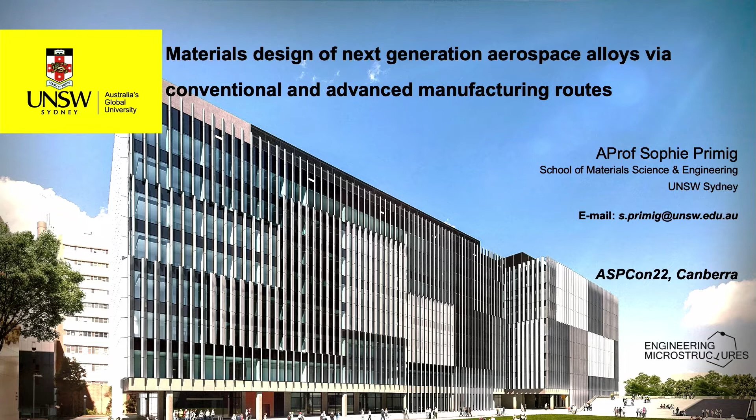Just to begin with, what I do in my day job: I lead a research group of around 20 early career researchers, so that's postdocs, PhD students, and undergrads. We are interested firstly in next generation aerospace materials, but more recently we also got into the quite exciting area of metal additive manufacturing.

My research is funded roughly 50-50 by collaborations with national and international industrial partners, sometimes also by the Australian Research Council linkage scheme. However, in the last 4 years or so, the real game changer for my group has been funding by the so-called AUSMURI project, which is supported by DST—more on that later—and that's how we got into metal AM, which I regard as the future way to go for Australia.

We have access to amazing facilities for processing, characterization, testing, and modeling of alloys, and the alloys that my team is interested in for aerospace are nickel-based superalloys, titanium alloys, and several advanced steels.

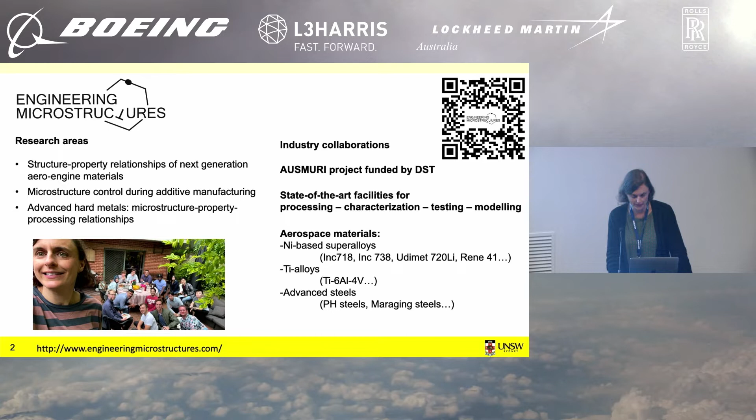A lot of the motivation for my research, which ties nicely into the previous talk, is that there's a lot of air travel. Obviously it's been a bit disrupted by the global pandemic, but there are still forecasts, for example this one by Airbus, which predicts around 39,000 new aircraft within 20 years.

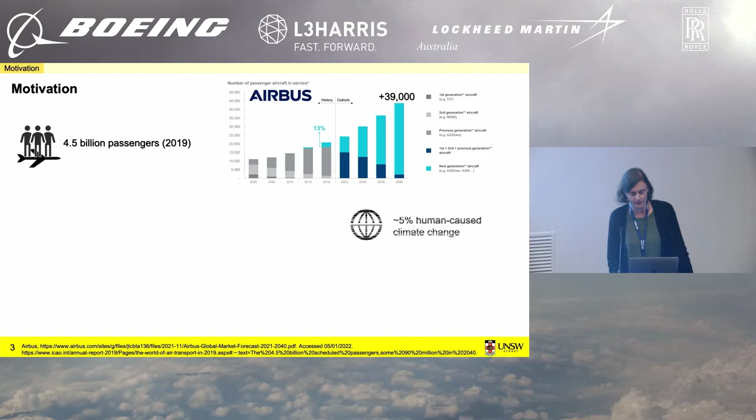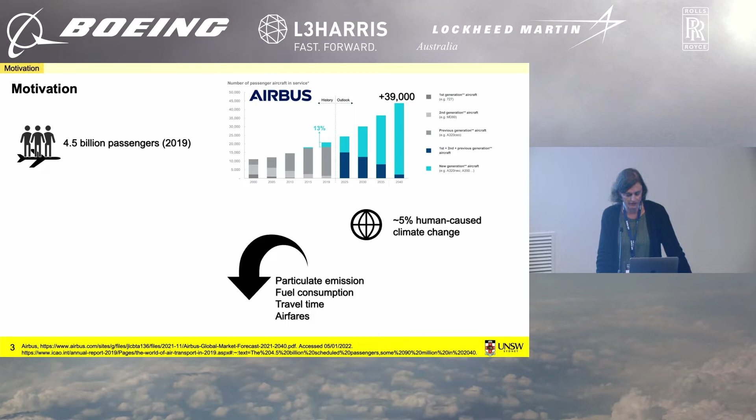What's even more important is that all of these aircraft will have next generation aircraft engines, so different technology. Taking into account that a lot of climate change is due to air traffic, one way we can improve this situation is to reduce particulate emissions, fuel consumption, and what's good for passengers is reduced travel time and airfares as well.

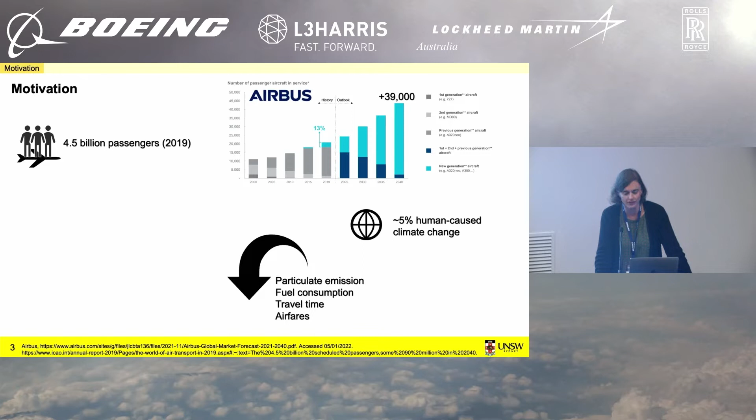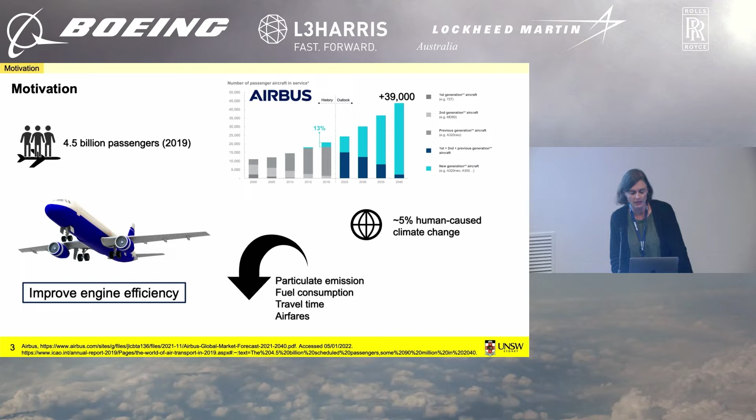One very important means to do that is related to improving engine efficiency, and that ties closely to materials engineering. So let's have a look at an aircraft engine. It has a bunch of different parts, but we are often interested in the high pressure turbine and low pressure turbine.

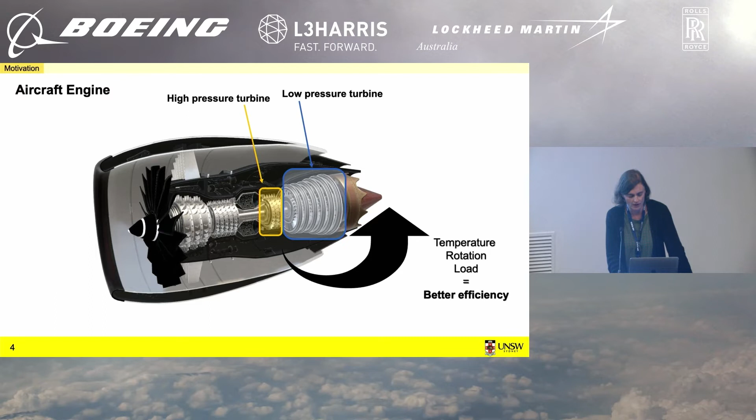Here a higher temperature, faster rotation, and higher load translates right into better efficiency. So the part that my research has focused on for probably a decade or so is the so-called turbine disc—that's this part here that carries the so-called turbine blades.

In order to increase the efficiency of aircraft engines, we want high temperatures, ideally above 650 degrees C. There are high mechanical loads, fast rotation, and very harsh environments—fatigue, creep, corrosion, oxidation, and all that. Therefore, we need so-called nickel-based superalloys to build these parts.

So in order to make better turbine discs, we need to understand the interrelationships in materials engineering. What we want is obviously better performance and better properties. We can tweak the processing to achieve that, but the really missing link between all of those is microstructure, and that's what my team and I are pretty good at.

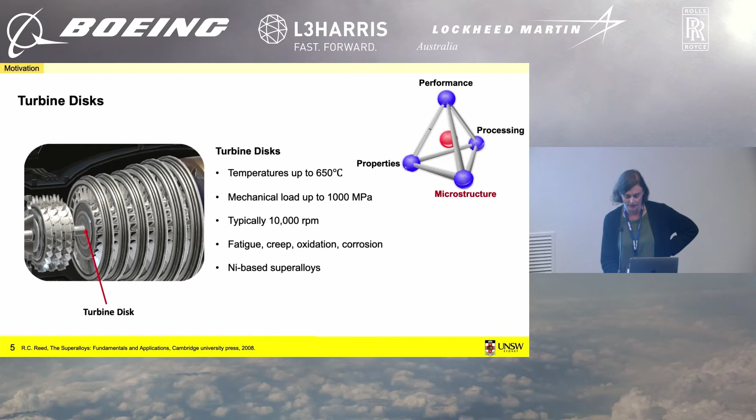So let's look at how we can make modern aircraft engine parts. There's obviously conventional routes—this is a photo from an industrial partner based in Europe. It's actually massively complicated, and conventional processing requires large plants.

You need to cast these materials, remelt them often 3 times, undergo a complicated multi-step forging procedure at high temperatures, and at the end apply a thermal treatment to get amazing properties. However, nowadays there are new ways of doing that via metal additive manufacturing.

My team is very often interested in powder bed fusion, so more on that later. But what we ultimately want to achieve is to shift these curves to higher temperatures and higher strength, and you can do so by getting the best out of existing materials and by designing new materials.

This is an example from my research on alloy 718, where we work a lot on a forging schedule called DA, or direct aging, that achieves the highest strength properties.

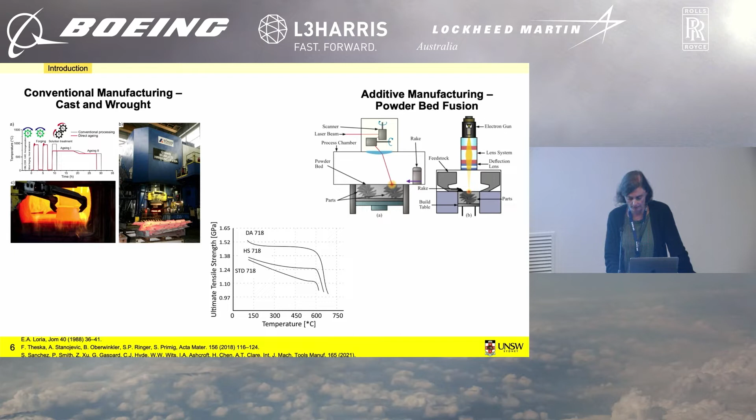The key for all of that, as I said, is microstructure characterization, and we do a lot of microscopy. Don't worry about the details here—what I just want to show with this slide is that we need a bunch of correlative techniques, ranging across several length scales, because these microstructures are highly hierarchical, and that's how we achieve amazing properties.

We can use light, on the left-hand side here, to show grain and dendritic structures. We can use electrons to go from the micrometer towards the nanometer scale. We can extract crystallography information, and we can extract information in 3D.

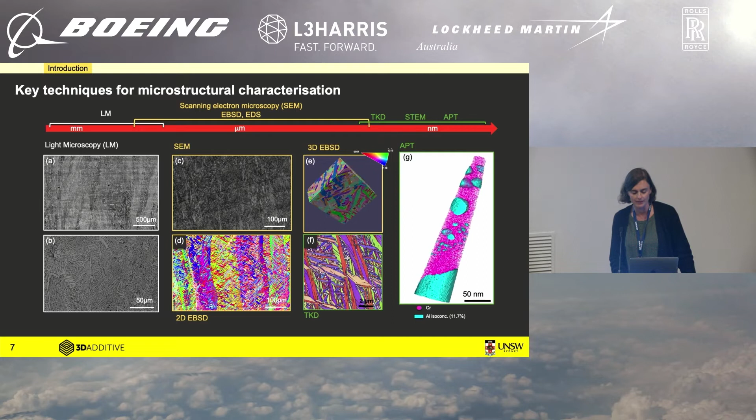Another quite important tool for my research is the so-called atom probe, where at the nanoscale we can image individual atoms and understand the nanoscale chemistry and morphology.

Let's apply that to an example from conventional processing. What you can see here is the slice of a real-world forged turbine disk made out of Inconel 718, overlaid by a hardness map. You can see there's vast differences because these parts are really complicated, and what we don't want to have - this is a worst-case scenario map here - in this blue region D, we achieve a way lower hardness than in the other regions.

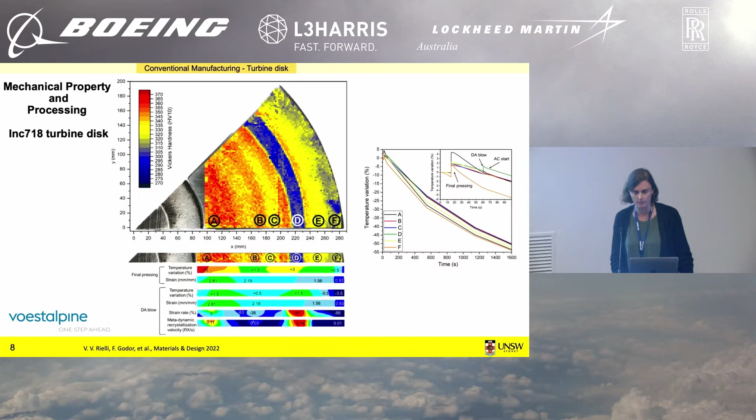So what my industry partners and I do is a lot of modeling, so we can find out things such as temperature, strain rates, strain, recrystallization, thermal profiles, etc. But all of that is not enough to create a real digital twin of these turbine disks and the different positions.

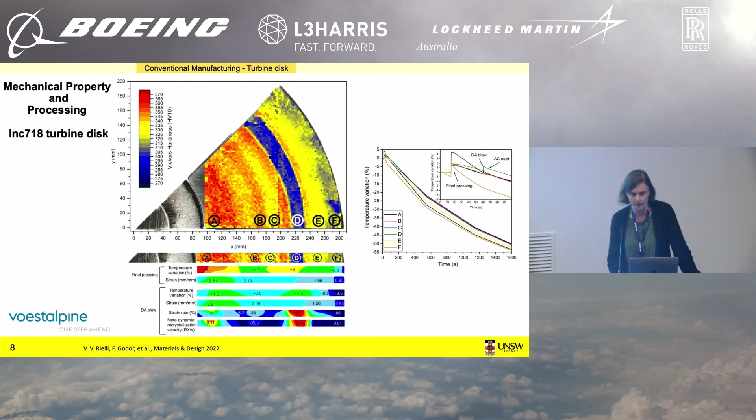So let's dive into the microstructure here. What we did is characterize a bunch of interesting regions. I mainly want you to focus on region D, which has the worst case properties. On the micrometer scale here on the left, you can see individual crystallites, individual grains - that's how this material is made up on the micrometer scale. We can see that in this region D, the grain size is much larger.

Another example is shown here. What we're interested in is having a slightly higher volume fraction of these white particles than we see here in region D. That's the so-called delta phase. It's very important to pin grain boundaries during processing, and it's also an important source for niobium that we need in the next step.

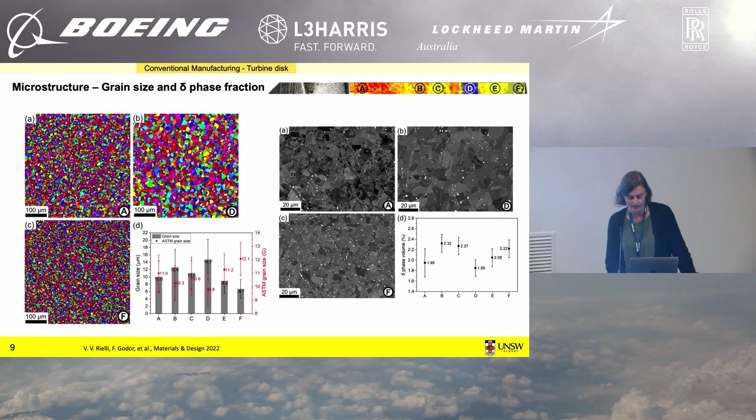In the next step, here you can see some atom probe microscopy - real nanoscale information of forged positions from this disk. What you can see is a slight decoration of the microstructure with nanoscale particles. There's two kinds in this alloy: one are called gamma double prime precipitates, rich in niobium, and the other ones are called gamma prime, the turquoise ones. So after forging, there's only a little bit happening.

The good news is the direct aging process is really robust, and if we subject these disks to a final thermal treatment, we achieve what we want - a very dense and interconnected nanoscale decoration with precipitates.

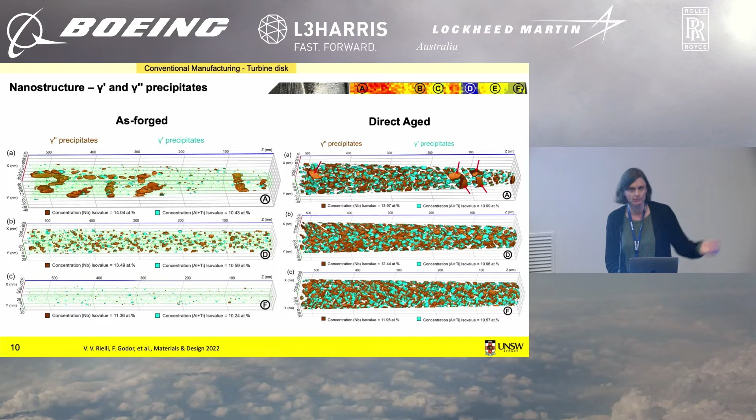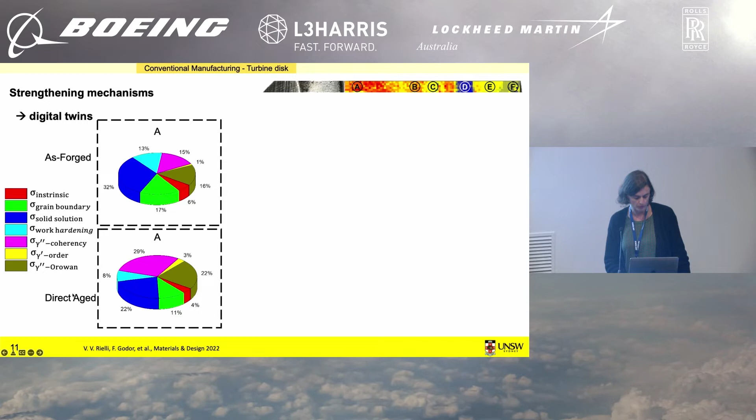So that's all very nice, but why is this useful? My industry partners can create digital twins where we can very accurately predict all the various strengthening contributions. Don't worry about the details here, but there's many, and that's related to the microstructure, and we can do this for all these different positions, and then create turbine disks with better properties.

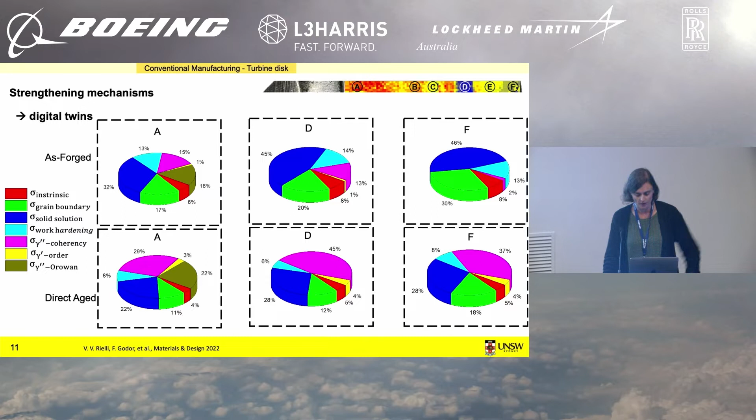I want to jump on to another quick example for really aerospace. This is a material, Rene 41, that's also being manufactured in Australia, in Perth. It's actually an old alloy - it's been to outer space, which is pretty cool. Project Mercury, these capsules, had Rene 41 shingles to protect during re-entry.

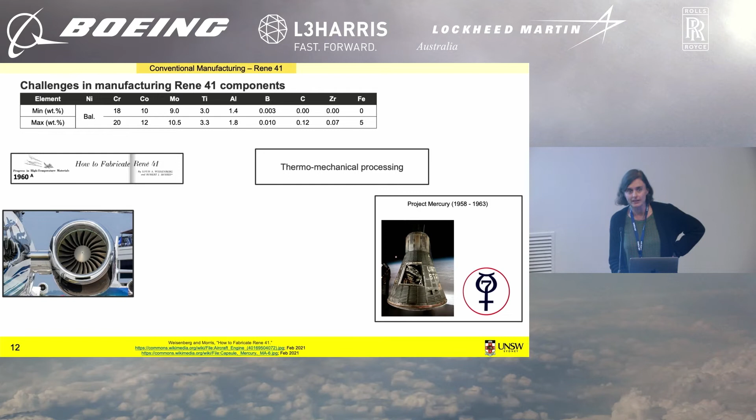This is one of the most highly alloyed and strongest nickel-based superalloys, and it's crazy interesting for next generation aircraft engines. However, it's not easy to manufacture, and if you get it wrong, this happens, and this is going to go back to the scrapyard, and that's going to be huge losses for the industry partners.

So what we do in my research is modeling, so we can predict precipitation of secondary phases as a function of the alloying contents. We can underpin this by microscopy, and with that we can define safe processing conditions for my industry partners to make better Rene 41 parts.

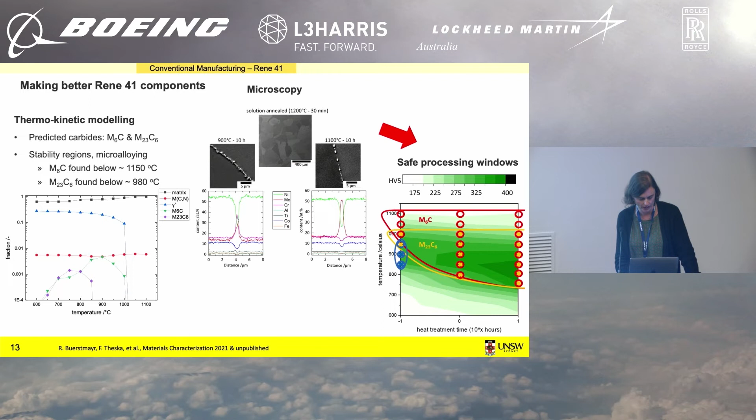I now want to jump on to what I believe is maybe the future for Australian manufacturing of aerospace alloys that's independent of supply chains and more resilient. This is related to metal additive manufacturing, and I want to shout out to the so-called AUSMURI funding.

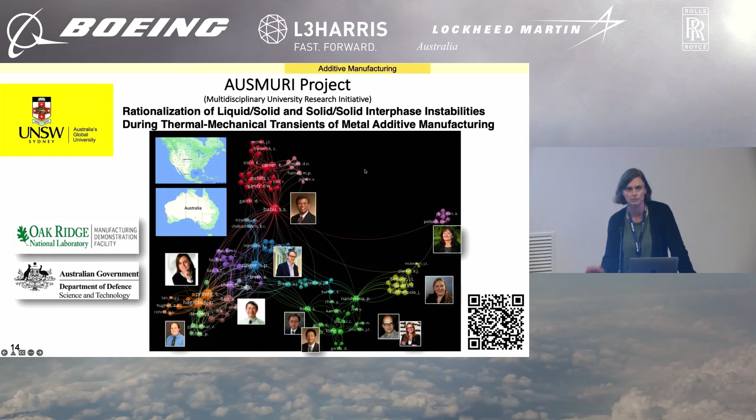Our project, don't worry about the complicated name, is on metal additive manufacturing. It's in its 4th year. I collaborate with a team from the University of Sydney, so we are very good friends in this - Professor Simon Ringer and Professor Xiaozhou Liao. And we are also connected with 6 universities from the United States, led by Professor Suresh Babu at Tennessee Knoxville, who has strong linkages to Oak Ridge.

And then we can create 3D objects that are very complex and intricate. This is also a little bit of an advertisement for my colleagues at the University of Sydney. They have recently launched a new Sydney Manufacturing Hub where we can 3D print titanium alloys, steels, and nickel-based superalloys using electrons and lasers, and also 3D print ceramics and all sorts of exciting stuff.

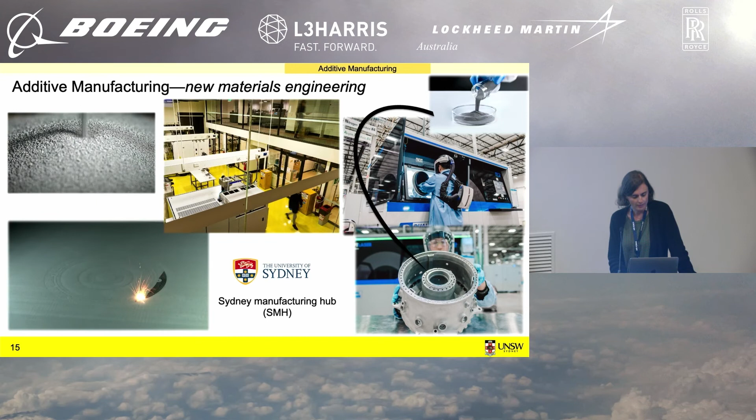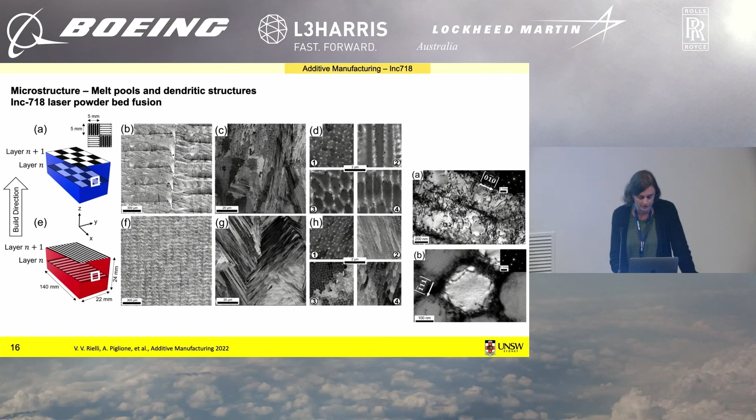So just coming briefly back to the Inconel 718 example, the turbine disc we've seen before. Rather than playing with forging in 3D additive manufacturing, we can play with the scanning strategy of the laser beam. Here's a chessboard pattern, and at the bottom a linear pattern, and again you can create vastly hierarchical and different microstructures. We need to study them across several length scales to understand how we can achieve better properties.

We can also subject them to thermal treatments to achieve the same kind of nanoscale structure of gamma prime and gamma double prime particles, and we can use that to put into models and predict better properties.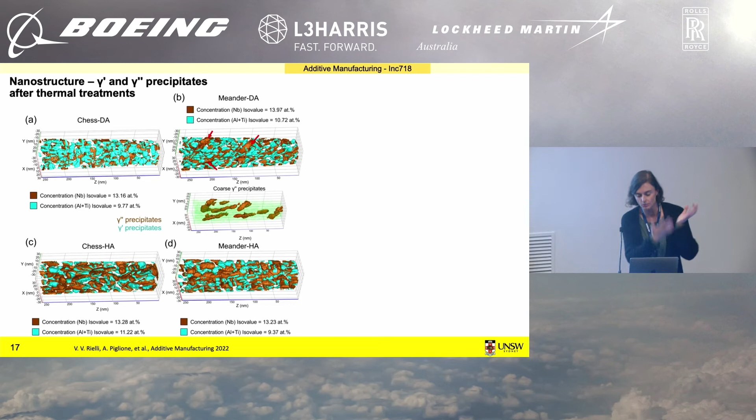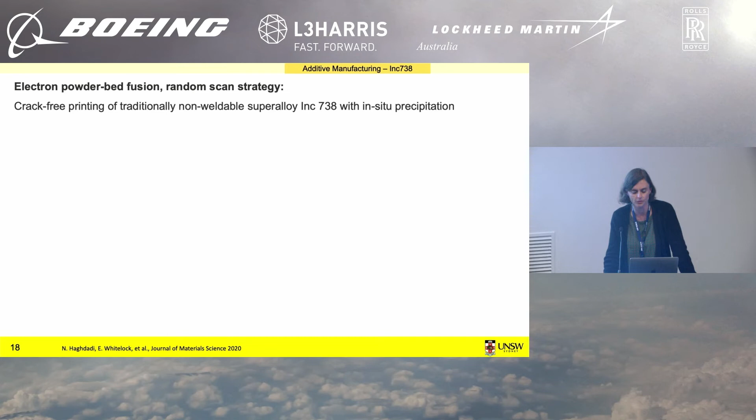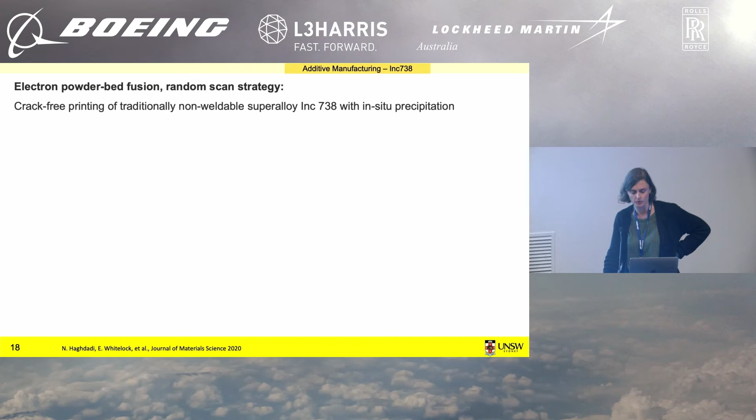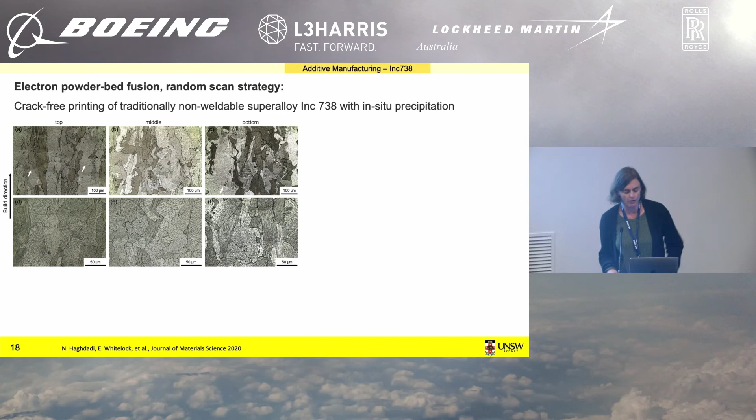Last quick example, this is for electron powder bed fusion, and we're very excited because the electron beam allows us to do very different and new scanning strategies. We used a so-called random scan generator, which just fills random points. This enabled us to print a traditionally non-weldable nickel-based superalloy, Inconel 738, crack-free. You just have to believe me based on these micrographs. And at the same time, without any additional thermal treatment, because this is done at slightly elevated powder bed temperatures, we achieved a nanoscale in situ precipitation of the particles we wanted to have.

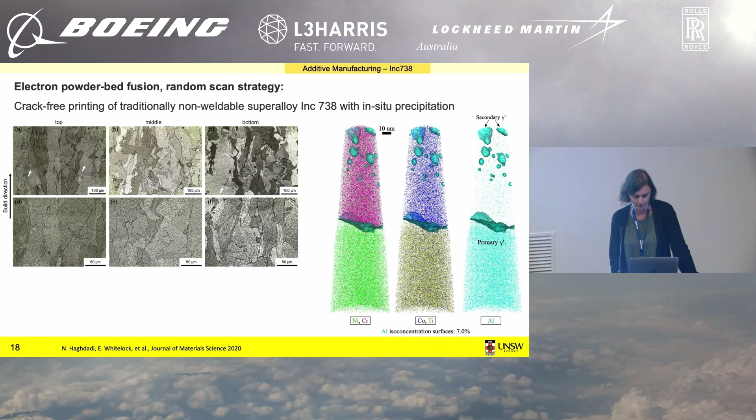So to sum up, microstructure and materials engineering will enable us to ultimately create better aerospace parts with superior mechanical properties. I can maybe relate that to the example from yesterday, the spear, if you remember. What my team can do is provide the perfect material for the spearhead, right? And this is how it fits into the larger scale of things.

We can also provide input data for modeling. We can develop strategies for the design and processing of new classes of alloys for next generation aerospace applications. And additive is a big game changer and will allow us to do things very differently, and that's very important for Australia, I think. So my message here is additive manufacturing is the new way of doing materials engineering.

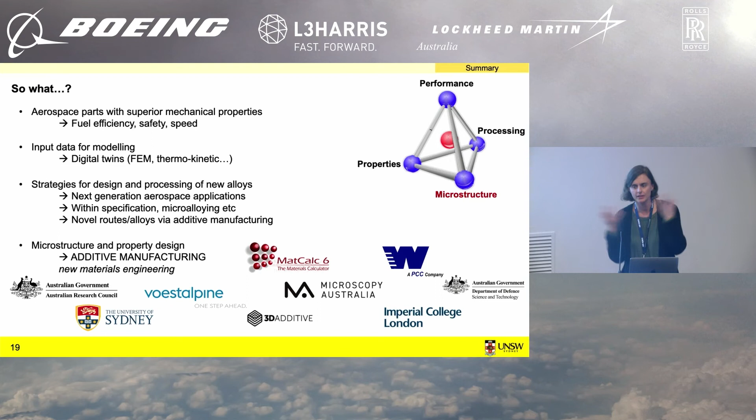And to sum up, I'm here to explore new ways of collaboration and what's next, maybe after my AUSMURI project. So if you think we can help each other in any way, please feel free to reach out to me or my colleagues at the University of Sydney.

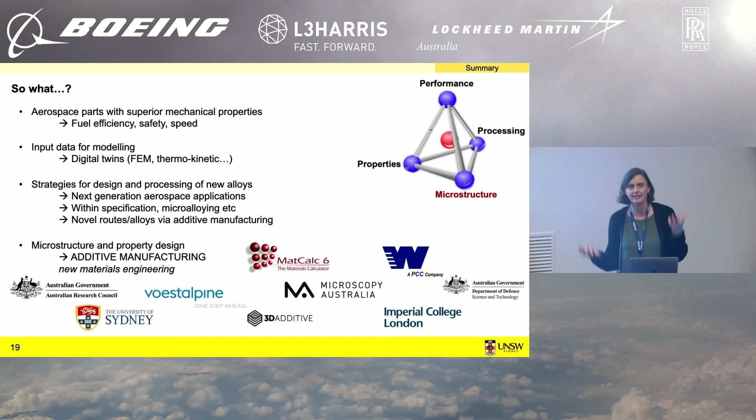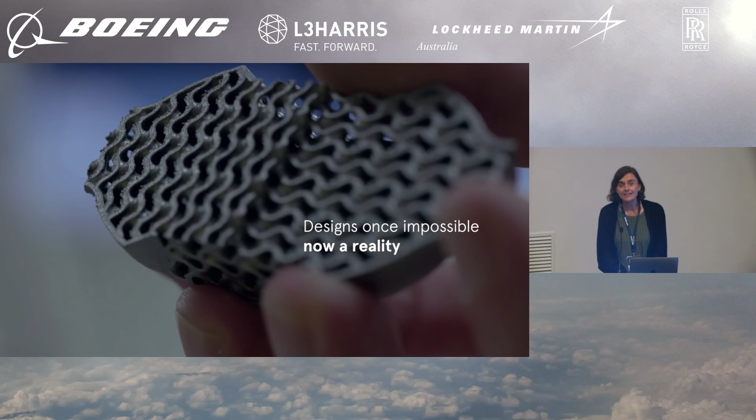Oh, thank you. Yeah, as soon as you can tell me that it's going to be cost effective. So how far are you, with your research, from being at a good competitive level to normal production?

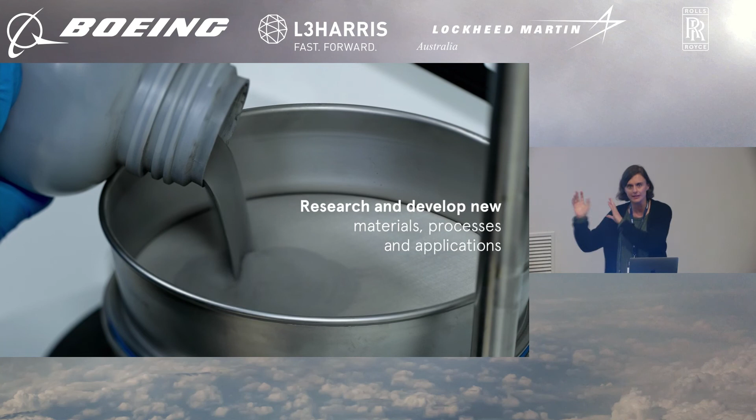Are you talking about the additive part, or the first half of the presentation? All of what I've shown is actually real materials that go into real aircraft engines, so it is cost effective. To give you one example, this so-called direct aging process that we use is actually more cost effective than previous processes, because it skips a very important, previously necessary 1100 degree heat treatment. We just skip that altogether, making it shorter and saving energy. At the same time, we gain roughly plus 10% in high temperature strength. So definitely cost effective, if these numbers help.

The René 41 materials, the problem there is the yield. They sometimes tend to crack because they're so highly alloyed. But we have helped our industry partners adjust the chemistry within specification, and we have largely mitigated these issues now. I hope that helps.

Yeah, of course. So it's going to be... I'm not so good with the cash numbers, that's the job of my industry partners. That was exactly my question. Okay, okay, thank you, no worries.